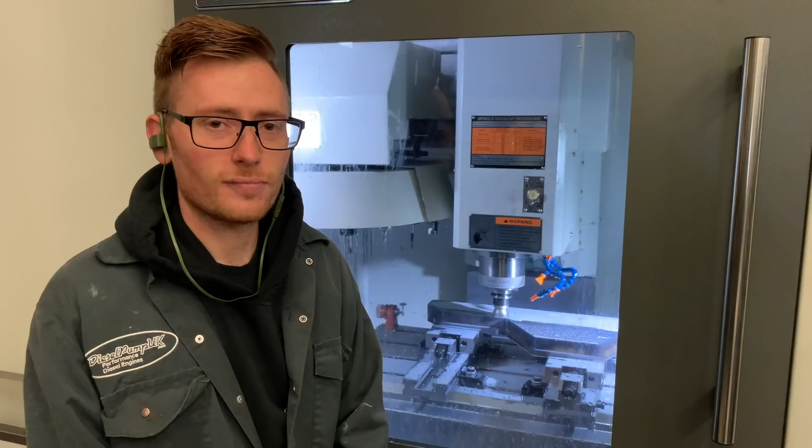Good morning. That noise behind me is a 52mm high feed cutter taking 1mm a pass off a 60mm piece of plate. Today we're talking about billet manifolds, how we build them and how amazing they are.

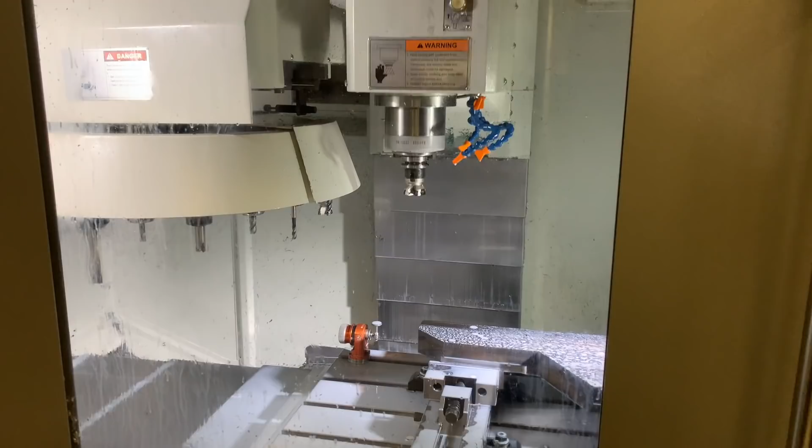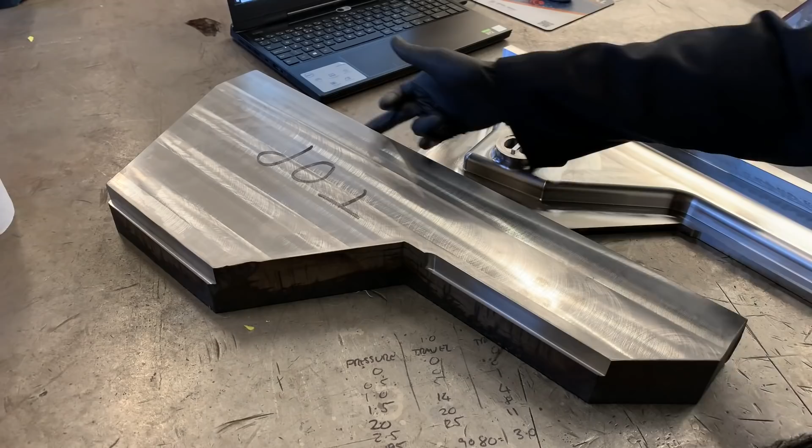So we've just seen that first step in the CNC machine, starting from a 60mm piece of plate that's pre-flame cut, surfaced off, and turned into this. This is basically the very first step, and as you can see, the sides have also been machined to make it parallel, so we've got somewhere good, clean and straight to grip onto. That's step number one.

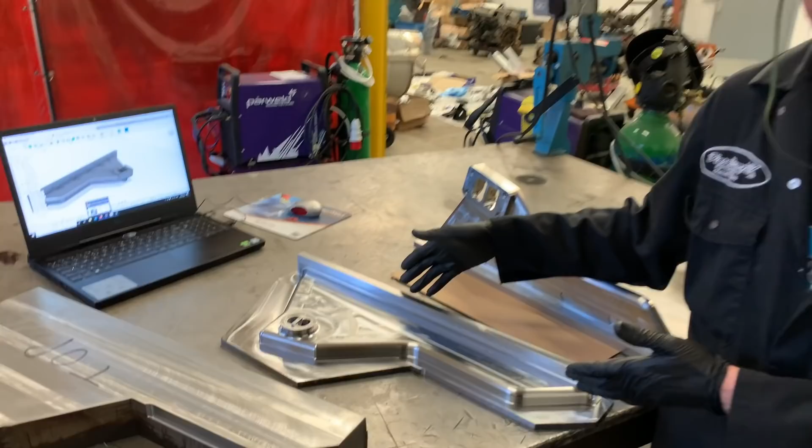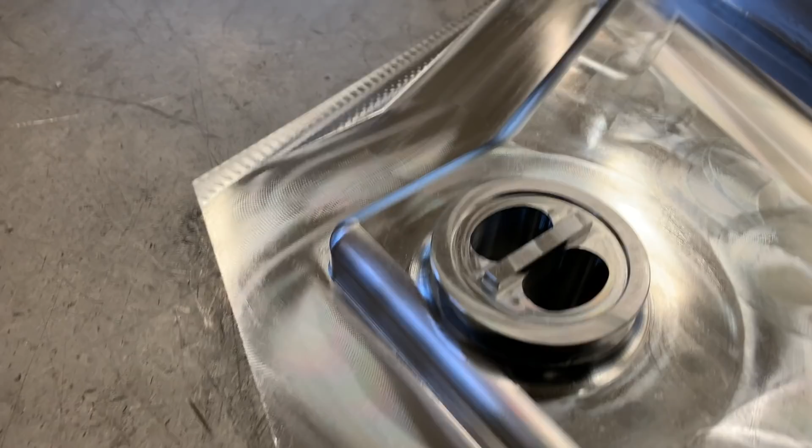Step number two is this here, and you can sort of see it's starting to look like a bit of a manifold, and this is the rear profile. Now this one's quite nice, and we haven't shown you this one before. This has got the Turbosmart 40mm wastegate flange built in, which is really nice. This is a Gen 5 Turbosmart 40mm CompGate.

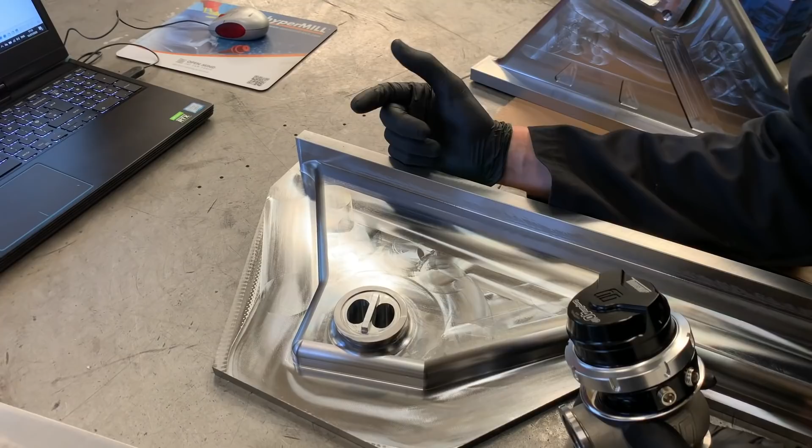This is the high pressure version, so 30 psi is what we're set at from the factory. The whole point of what you can see here is to reduce the need to have two wastegates on a twin scroll setup, because you've all seen probably Skylines, Supras and big power cars like that which have two sets of wastegates for your twin scroll manifolds, and it's just a mass of pipes and mess filling the engine bay. In some cases it looks cool, and in some cases it looks like just way too much filling the engine bay, too much complication. Anyway, so this is the idea we've come up with.

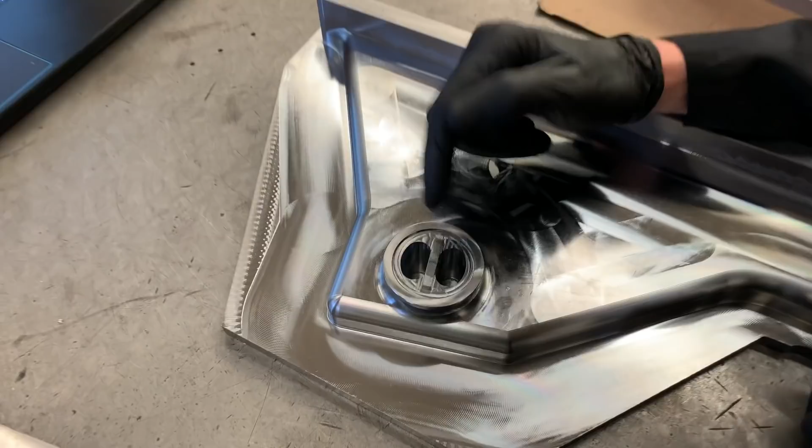So basically this little division helps to divide the wastegate, the gases that are going to go to the wastegate, nearly all the way up to the actual valve itself, the valve seat. This is about as good as it gets to get a nice divided section right up to your wastegate, and that's how we use one wastegate on a twin scroll setup. So that's step two, and that, as you can see on the back, is still

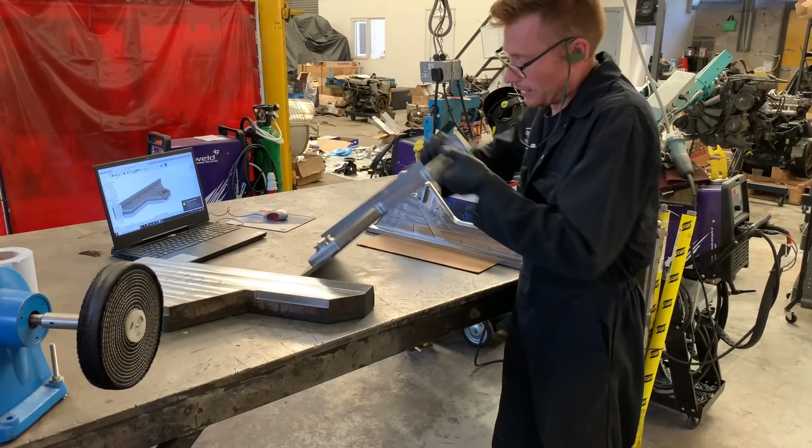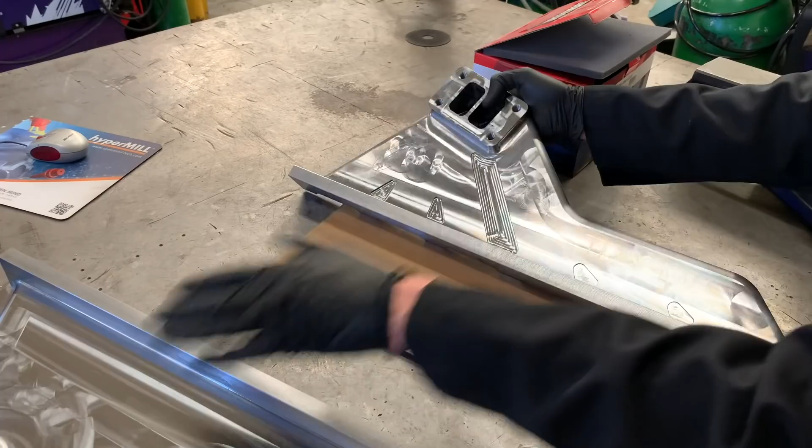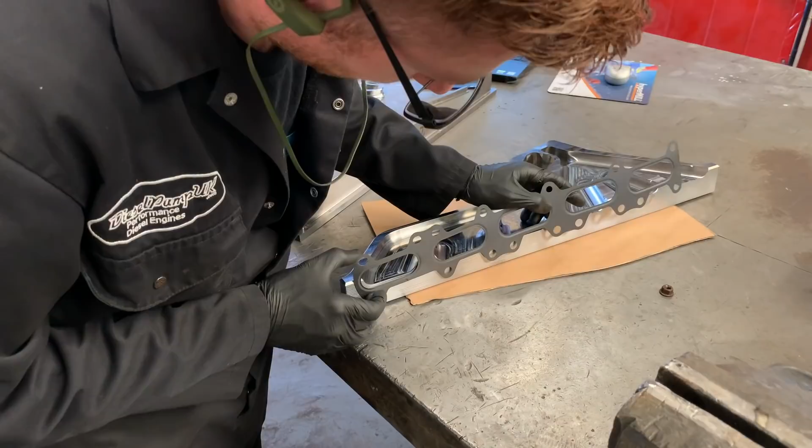just a flat plate. There's no inner profile of that at all. And then step three is this. So this has been through that process, and then it's been flipped, and these are your internal profiles. You can see here you've got really nice radiuses which match the port. You can see how the gasket nicely matches the port profile of that, and that is where we're gaining a lot of the performance over the other manifolds out there.

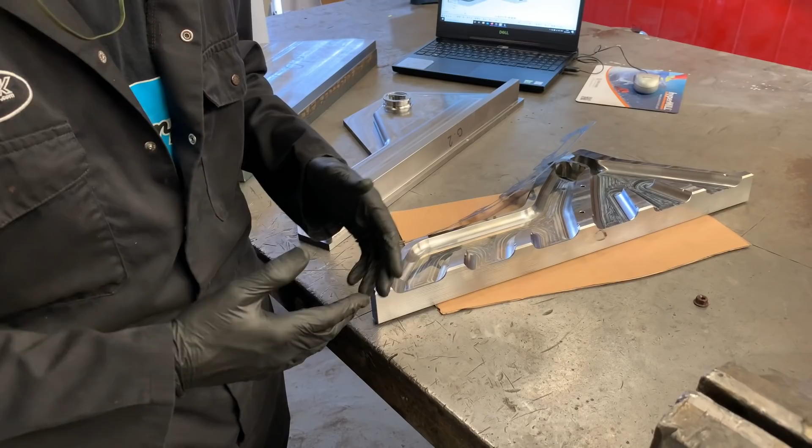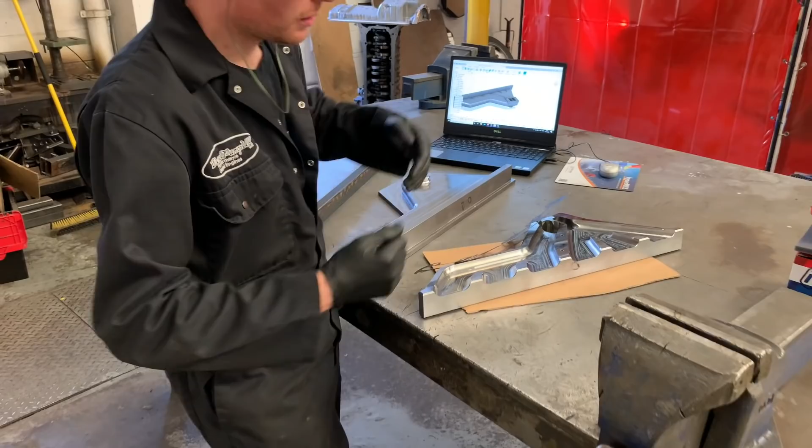We don't have to press cones. We don't have to die grind flanges at an angle. We're not having to get a CNC'd flange that, in a space of 20mm, really ramps in. None of that has to happen. With this, it's just a really nice, gentle transition, which is awesome for gas flow, as you can see - there's no sharp path or whatever.

You can see the two positions here, which is where the dowels go. And these two halves, when machined like this, will locate together, and then I will weld this all the way around. Inside the ports here, you can see there's a nice big chamfer all the way around, so I can put a nice good root pass in there, and then multiple other passes just to make that a really nice strong weld, so that it all stays rigid.

And then once that's welded together, obviously it all locates nicely. It'll get stood up, and then this top profile will be machined, so it'll kind of look a little bit like this sort of gasket shape. Obviously this is a 5-cylinder gasket that picks up, and this is a 6-cylinder manifold, but it will have that nice kind of wavy shape in it with all the holes. But that's the last bit after I've welded it.

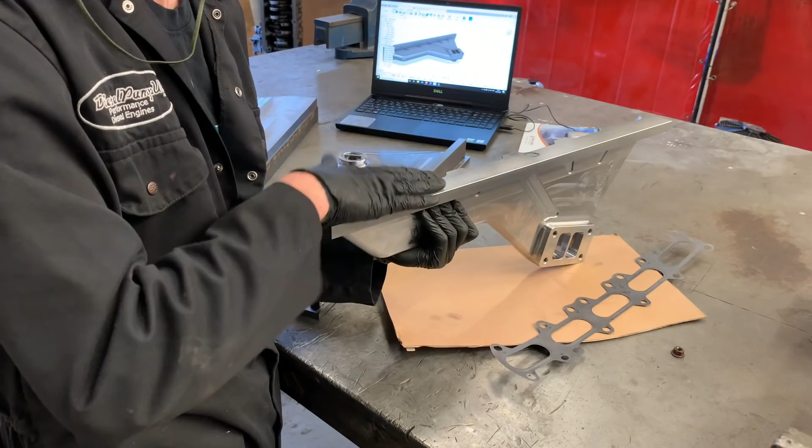Hello. Yeah. So now I'm the cameraman.

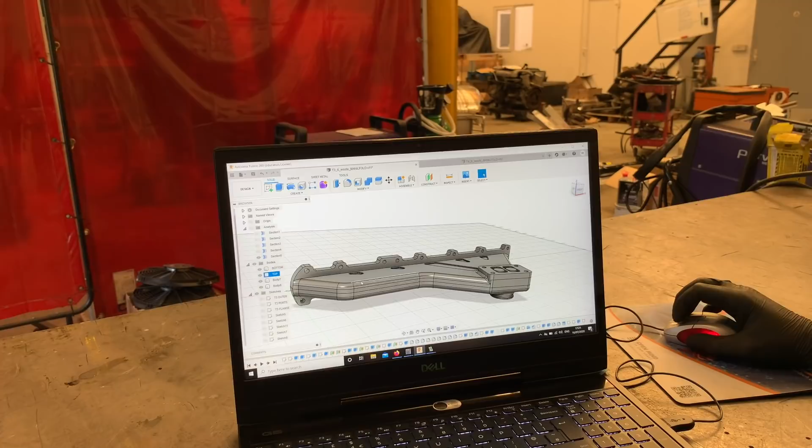This is the 3D model, 6-port manifold. As you can see, this has got it in. Now this hasn't got the flange on - let's put that back on. So that's obviously the flange shape that we're going on, so it looks nearer to the gasket. Yeah, that's good. All this side here will be machined after welding, so you get a perfect seal.

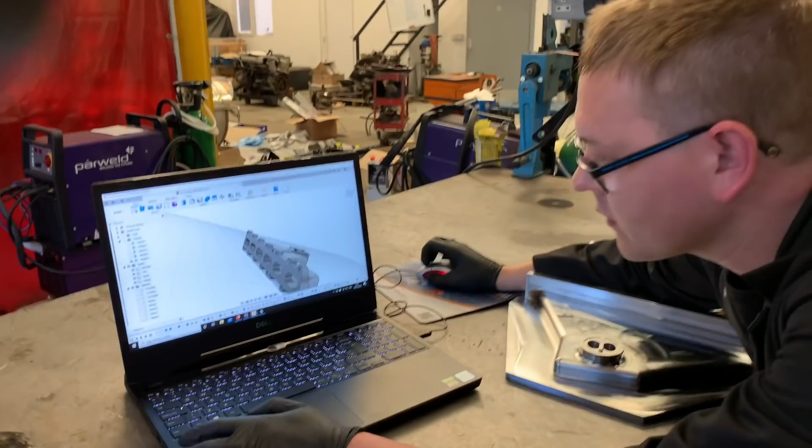So what about the cutaway? Let's see the throat area cutaway where the wastegate lives, because that really shows some of the detail that goes into that. Yeah, that's good.

So as you can see here... This is like your technical bit, but this bit is really crucial.

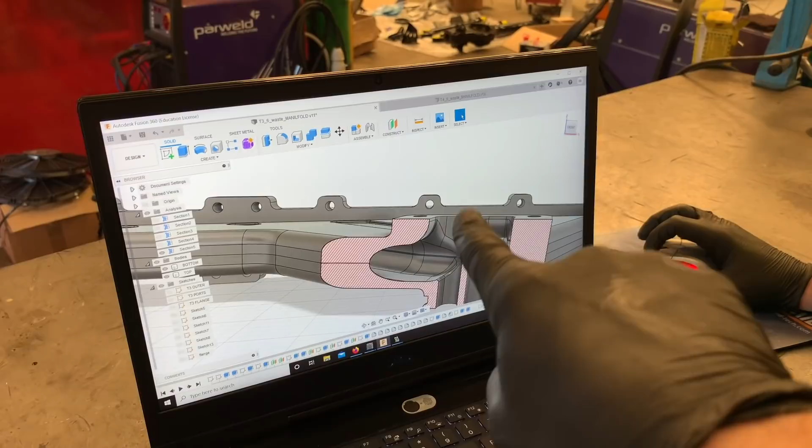Where the transition goes from being horizontal to the gas flow being vertical, the taper, the contour that leads up, is literally as gentle as we can get it. It actually leads into the upper part, so both the top section and the bottom section join together in this taper, which is really important.

And you can see there the path, how it takes a little bit of gas out of each side down to the wastegate, which is pretty cool. You can obviously see that on there. You can see the wastegate flange is even machined in direct.

Anyway, tell us something technical about that. So with the ports in the manifold, the port is either equal to or more than the exhaust ports coming out of the engine casting. So we have zero restriction in the manifold. Yeah, that's going to give us some nice gains.

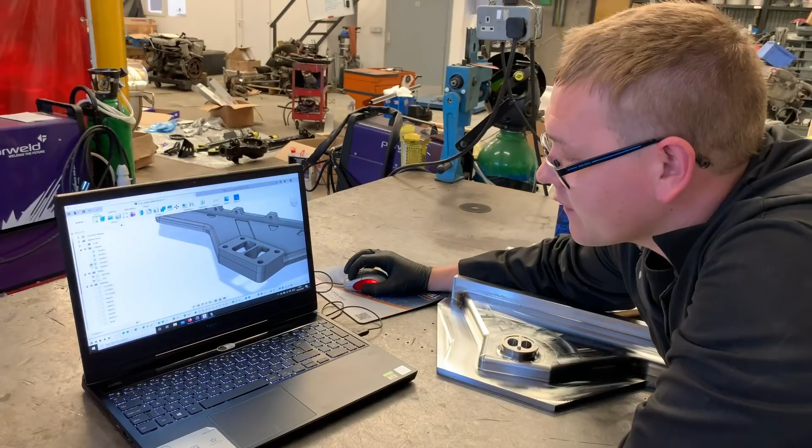That is good. So if we look at the other cutaway now, if we find the right one, there we go. You can see there how we've got a nice radius coming in.

Obviously that radius would look more natural if the wastegate port wasn't there. We do versions without the wastegate port. You can see it there.

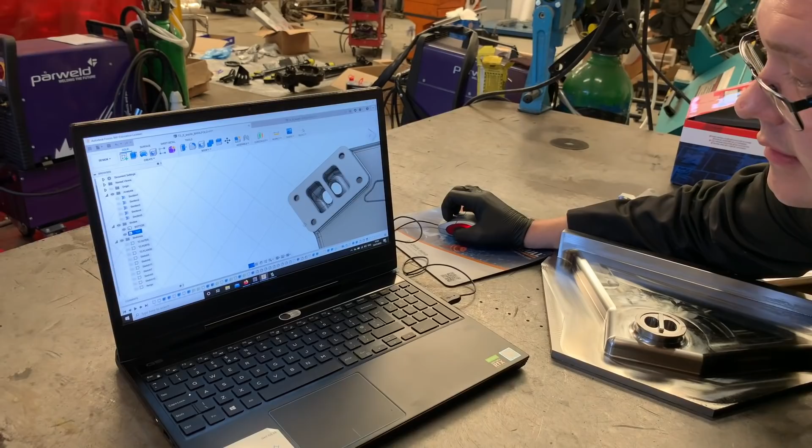That's also important to note, that the inside of this actually has a nice shape leading into the wastegate. It isn't just a rough cut hole that goes down. That's also very nice and smooth. So it's all got gas flow related.

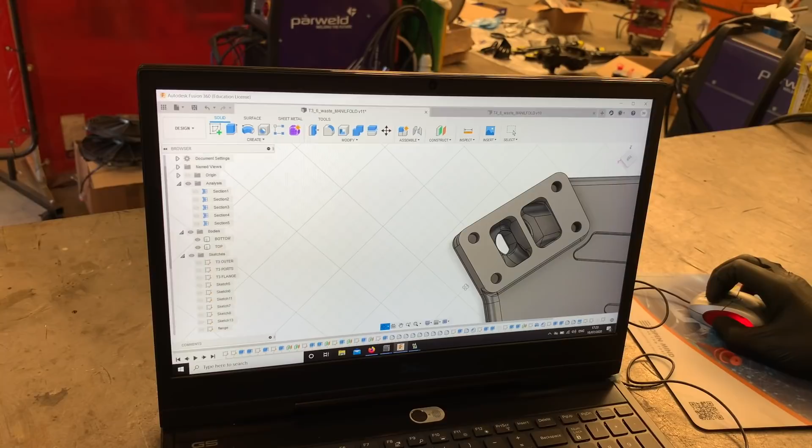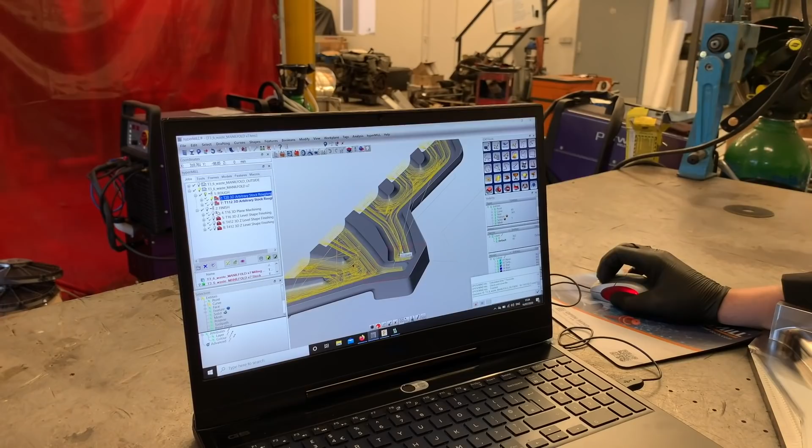So first of all, look at his roughing passes. So this is taking like 2 mil depth of cut and getting some material out just as fast as possible, basically. So that's just getting all the meat out.

But that leaves you with a really jagged edge, like steps. It doesn't give you any smoothing at all. And what cutter did you use? So we used a WNT XDKT using a 0.8 radius insert.

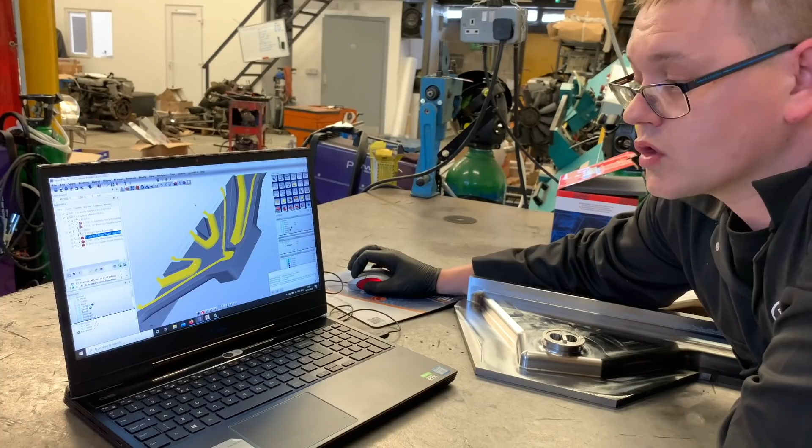Okay, we then go on to finish machining. So as you can see now, it's going down the walls at very small cuts but extremely high feed rates, and that's what gets us the smoothness of the parts.

And what tool was that? Again, another XDKT, but the inserts now had a radius on it to create a bullnose tool. Ah, right, okay, just a larger radius. Yeah, so 2.5 radius on this. Oh wow, so that gets us a real nice blend.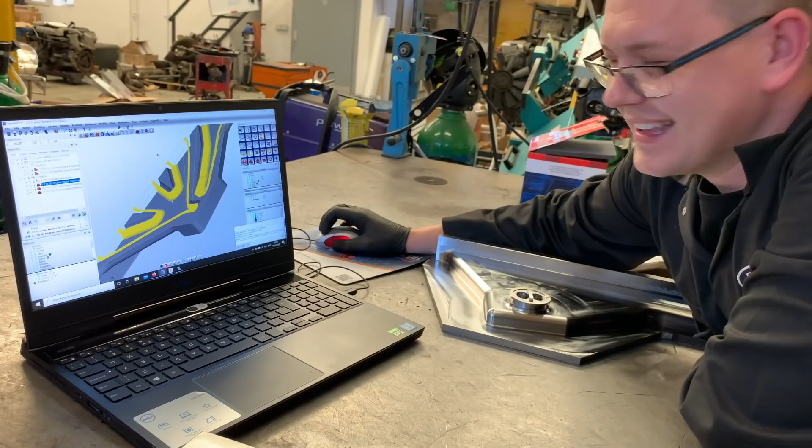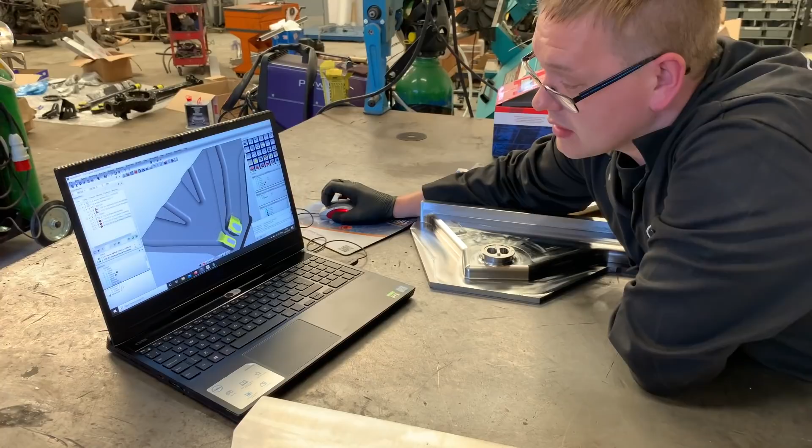Did you have to modify the tool body to make that fit? I did, yeah. And then finally, because it's a 16 mil tool, it can't get into all the little nooks and crannies. So we're going with a little 12, and the 12 mil ball nose takes out all the bits that the 16 can't get to. But rather than wasting all its time going around everything again, it only goes in and gets the bits that the 16's missed. Yeah, perfect, so it's all about just getting some efficiency out of the tool path as much as possible.

Right, well what I'll do in the next part of the video is show a little bit of that. We'll clean the screen on the machine and then show it doing a little bit of those passes.

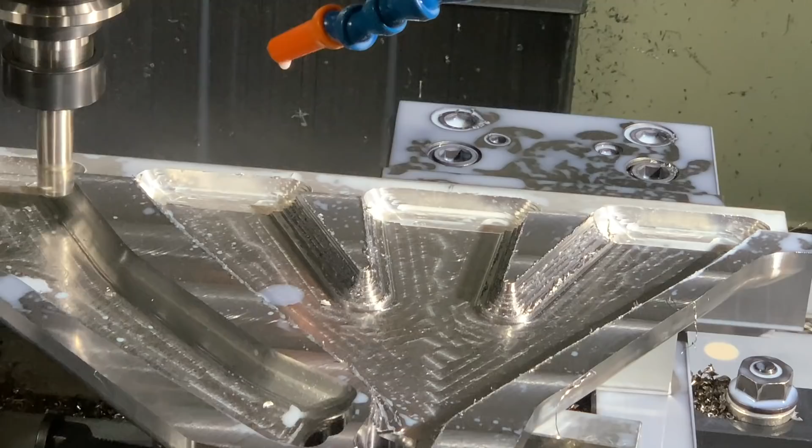This cutter is doing the final finishing pass. You can see, if you zoom in on a step section, the initial roughing pass, which is the first steps that we showed on Hypermill, and then this is actually just completing it and making them really smooth, which is nice.

Normally this would be running coolant and it'd be squirting everywhere, but for the purposes of this video, we're not, so that you can see the amazing things that are going on, even though it doesn't look like a lot's going on.

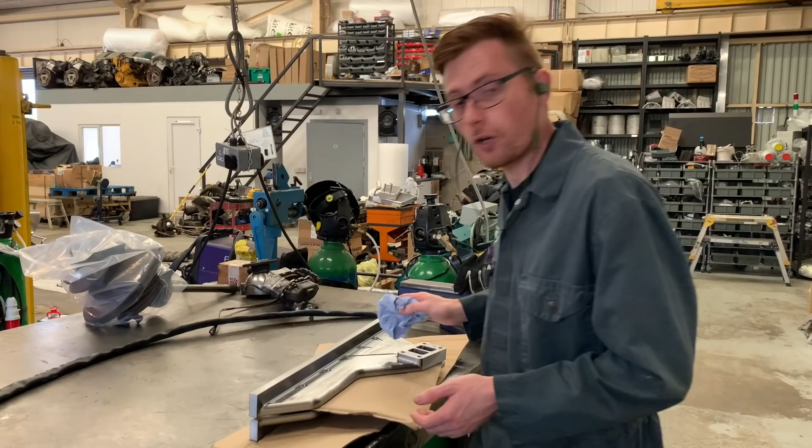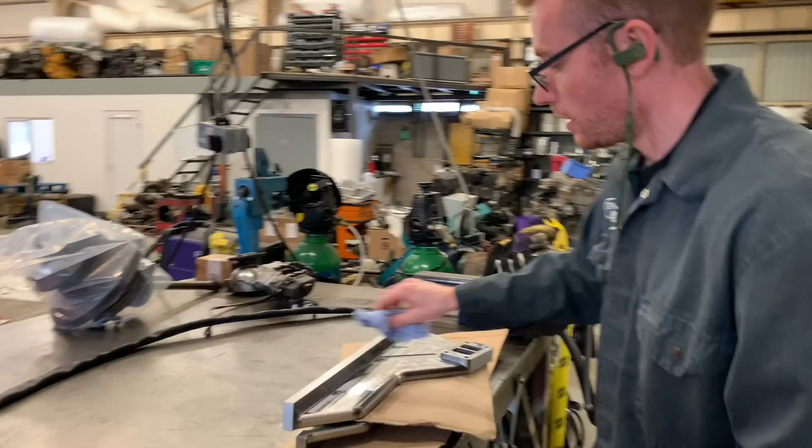We're on to the next phase now. Jonathan has presented me with 2 of his nicely machined pieces, which is great. And they've all been oiled up so that they don't corrode or get any surface rust overnight. So what I've got to do is take a little bit of thinner and wipe these all down just to get them absolutely clean, so there's no traces of oil ready for me to weld.

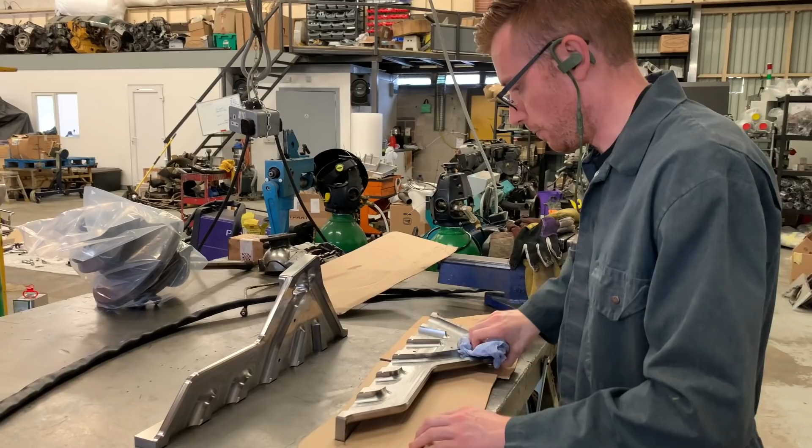So as you can see, I've got 2 perfect halves. They have dowel pin positions. I just have to pop the dowel pin in, but I like to give it a wipe out first. Look how nice they look.

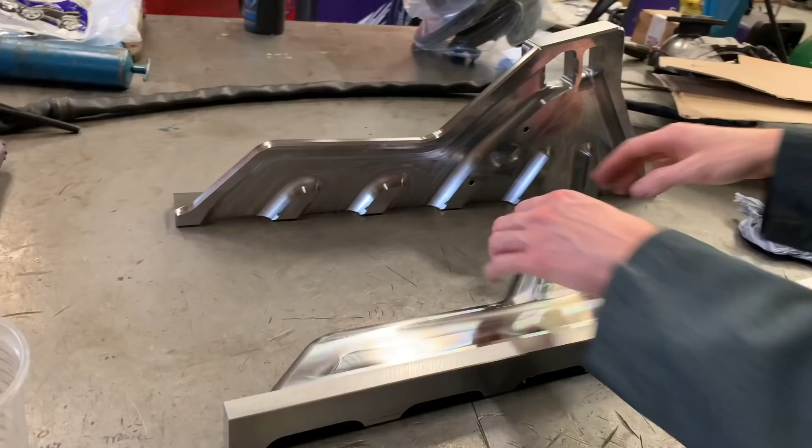Look at that with its wastegate. You can see these are unique. But there is a difference between this manifold and other billet manifolds out there, and quite a big one. This is being done just out of 2 halves. A lot of other manifolds you'll see will have a separate flange here and a separate flange there, all sorts of separate parts, where this isn't. This is actually just 2 sections, and it's quite rare to see that. It's very rare, in fact. I don't think I've even seen one other.

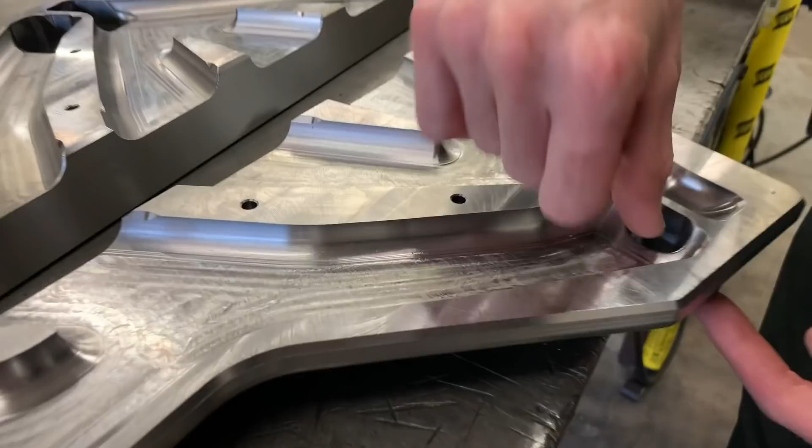You can see the wastegate ports, how nicely formed they are, and they even have a nice beveled edge, and then a nice ramp that leads up into the port as that comes round, so all super smooth. It's quite awesome. That's the last time it's going to be seen before I weld it.

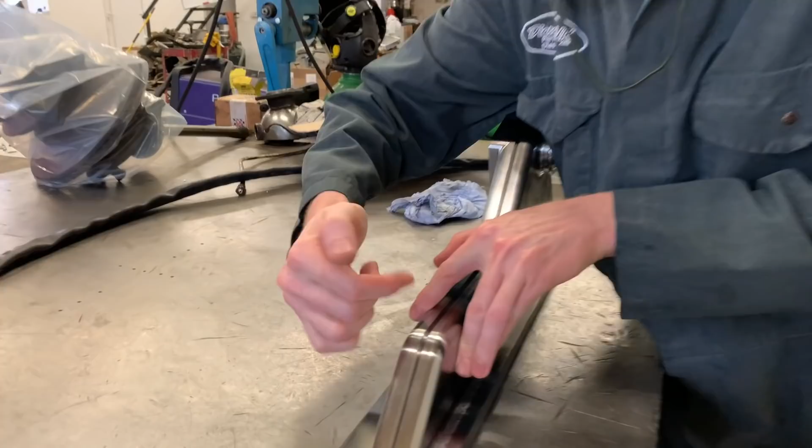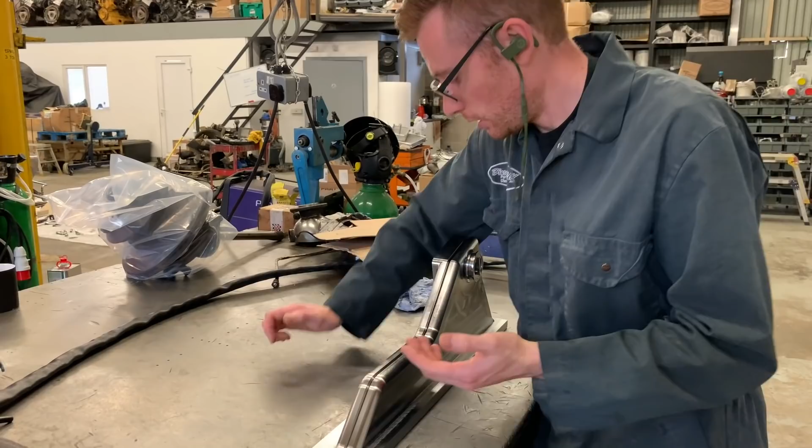And you can see here, we've left a nice weld prep, well, it's machined in, so that we've got a really deep groove. So that weld, you're talking sort of 5-6 mil of fillet in the manifold, even flush. So, you know, get that as super strong as possible, and that goes all the way around the back, and it actually goes even into the ports themselves just by a few mil. And I actually put the welder in there and TIG weld right down the actual ports to get them connected together.

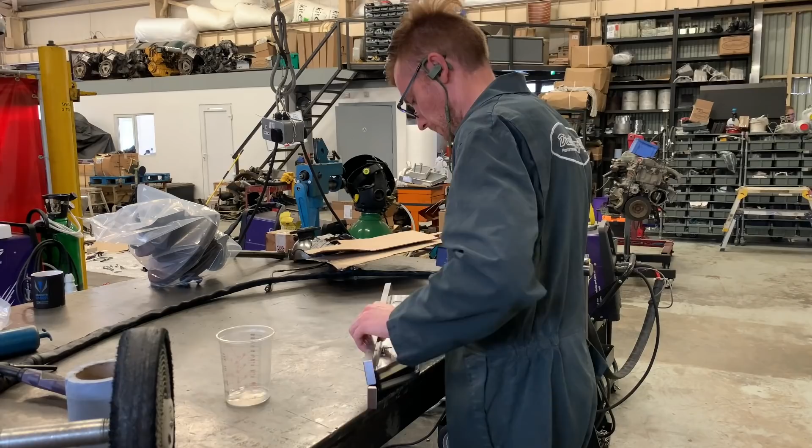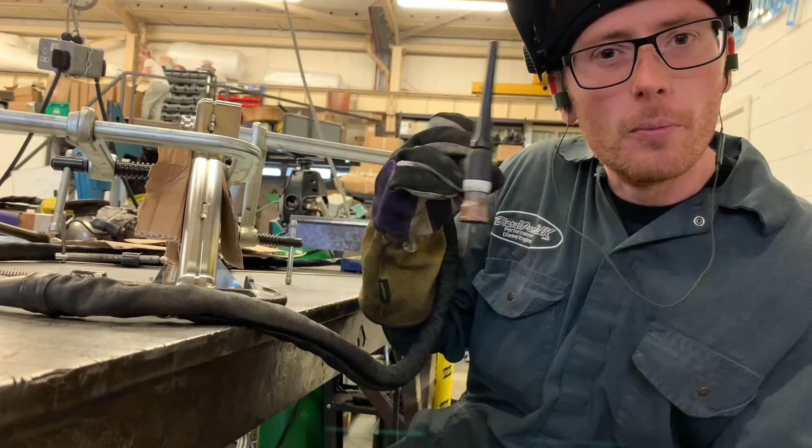Just applying a few tacks all the way around the manifold so that we can take off the clamps, and then that'll allow me to get much more movement and more comfort as I'm trying to weld it along the main passes. But it's coming out pretty nice.

Just adding a tiny bit of filler rod. This is the initial pass, so we need a decent bit of heat. Take your time and try not to burn the sidewall. I'm just running out of hand travel there, where I've got my hand rested, so I'm going to have to stop and move along.

I'm going over the original tack a little bit. I'm not going to take it to the full length. There we go.

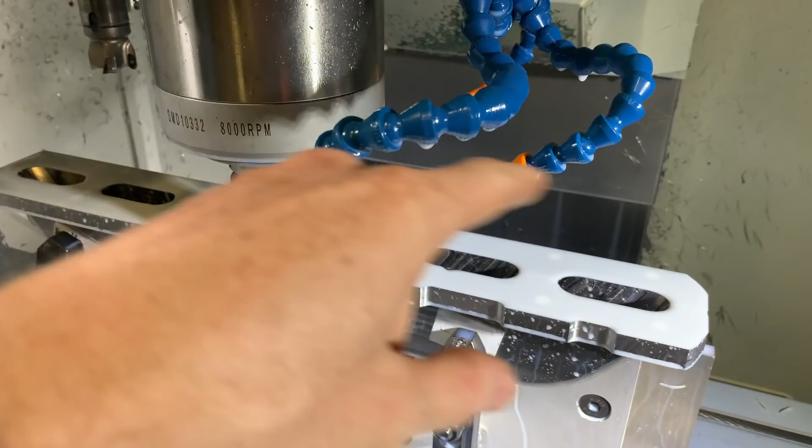So the final op, which is making it flange shaped, and you can see we've just started, and this is obviously where it's been welded together. Some spot marks have been done for the holes, everything's being clocked up, and yeah, take her away.

I like this process because it's the last one. And these are epic. Lots and lots of machining work. All to bring you guys the best manifolds for your OM606 or 605. Right, so this is the finished product.

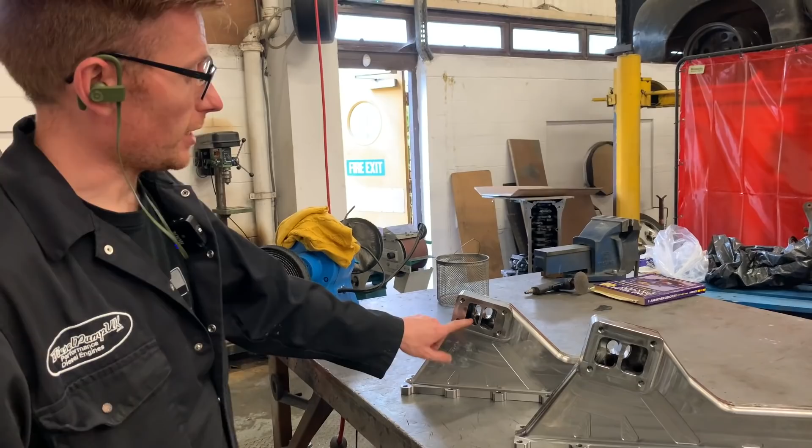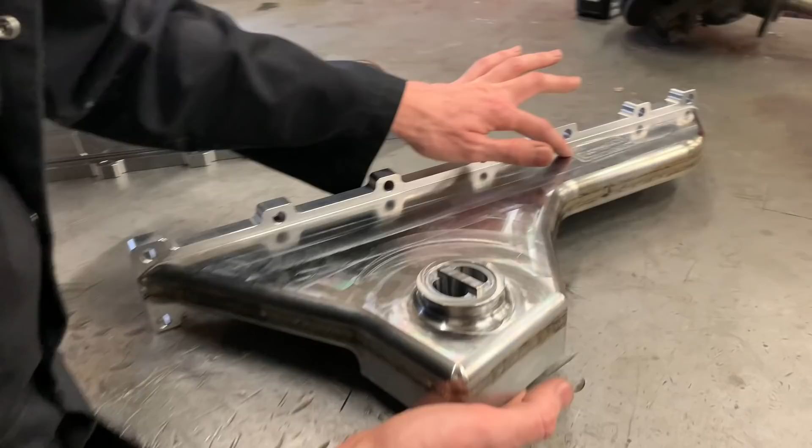And what have we got? We've got T3 and T4, and they're both wastegated versions. So we have the beautiful wastegate port in there. And as you can see, they're dated with the model. So this is a T4, 6-cylinder wastegate.

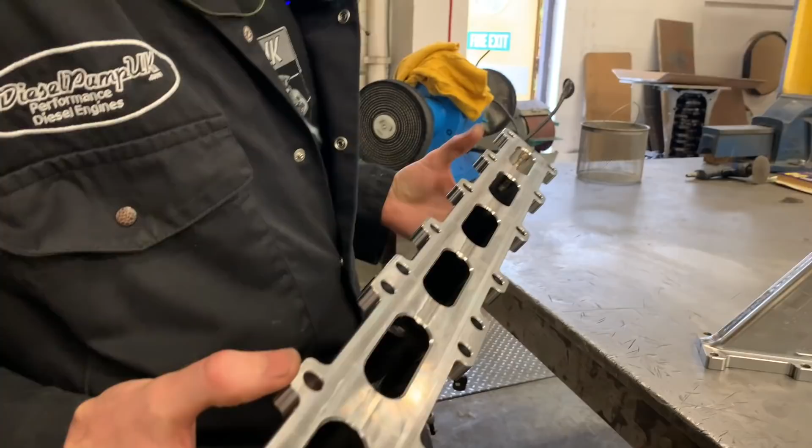But you can also see the flange is now fully finished. So you've got all the original shape put back in, a bit like the standard gasket, and all the inner profiles are chamfered. You can see where it's all been welded, and I'm really proud of the result.

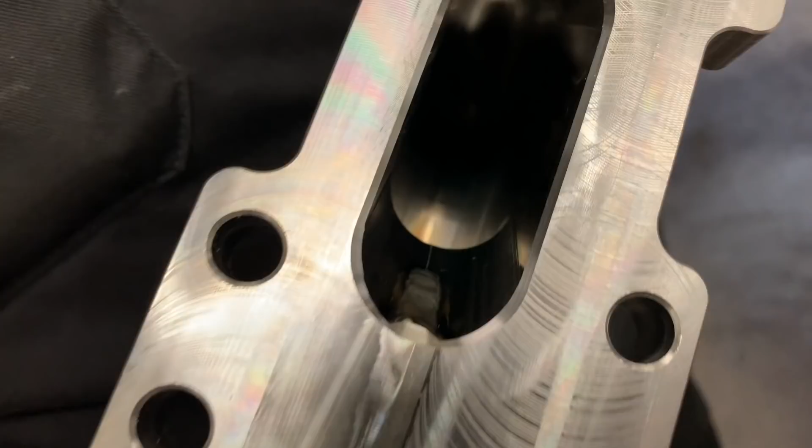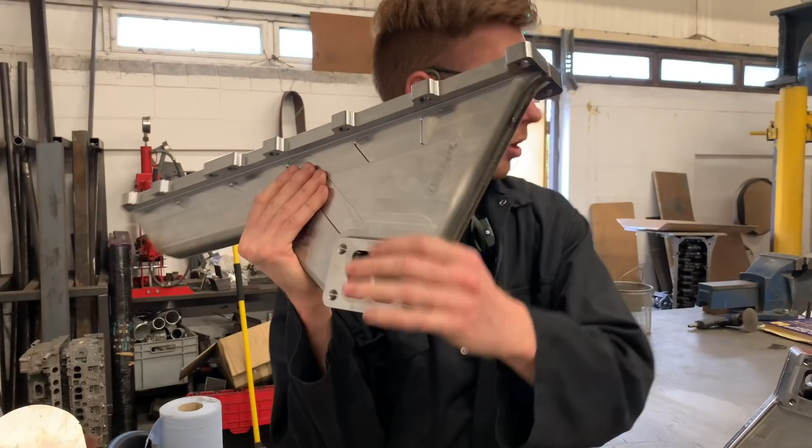It is a really fantastic finished product. One of the more interesting points is we did a weight comparison, because somebody mentioned the billet manifold versus the tubular. As soon as we put a photo of this online, someone straight away said I bet it weighs a ton.

Well, actually, let's weigh it and find out. Let's see, we'll do T4 versus T4. Let's find out.

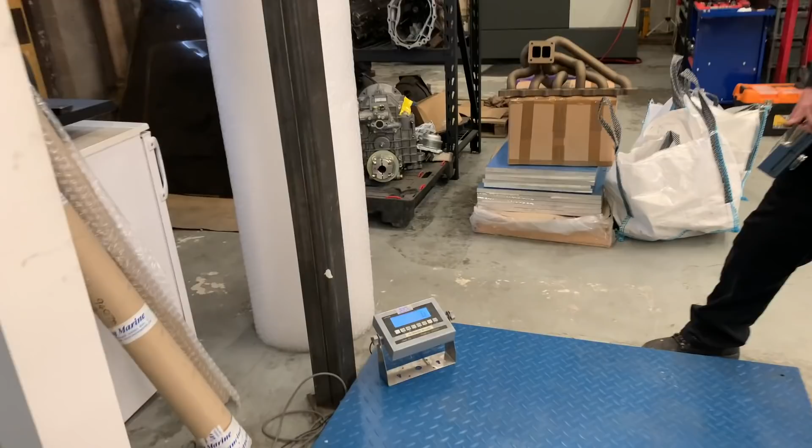Scales are zeroed, as you can see. 12 kilos for the billet manifold.

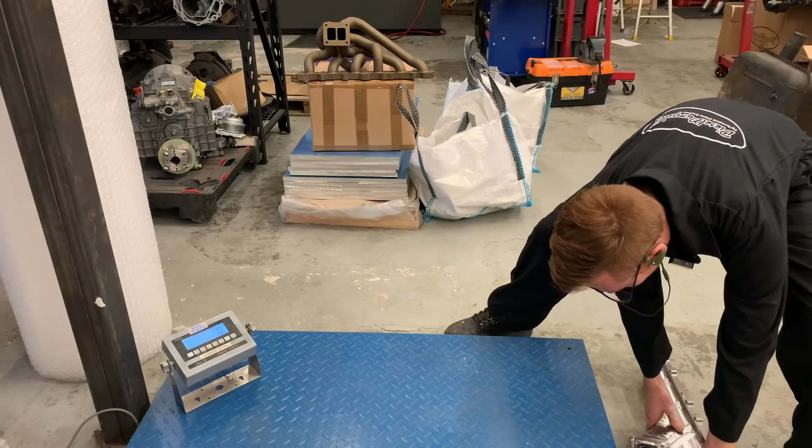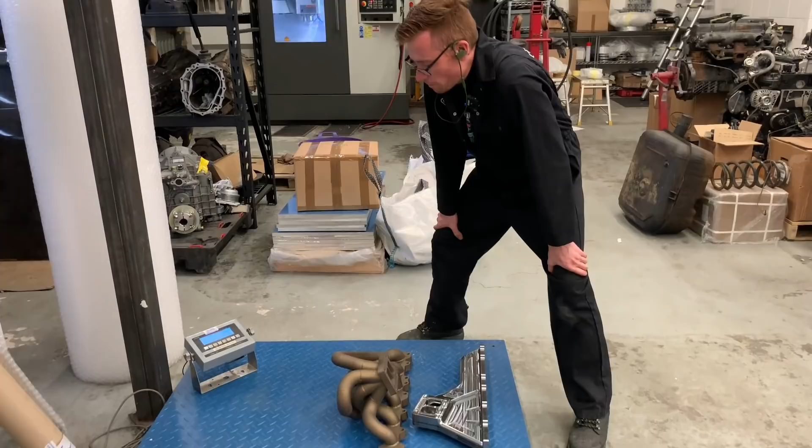Take the billet manifold off. Fabricated manifold: 12 kilos. So they are identical. Both are T4s. Let's put them both on together: 24. Both T4. The only difference is this one doesn't have a wastegate outlet.

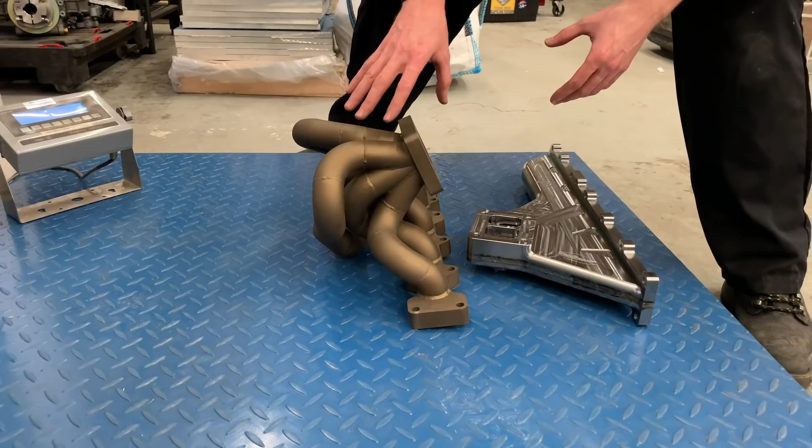Normally if we wanted a wastegate on this one, we'd have to weld an extra piece in here, so there would be a little bit more weight. It'd be negligible, but a little more. Still, you can see the obvious benefit between these two manifolds here.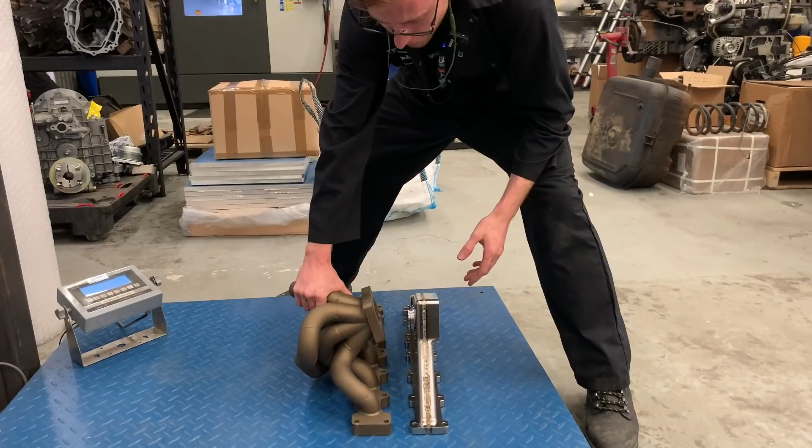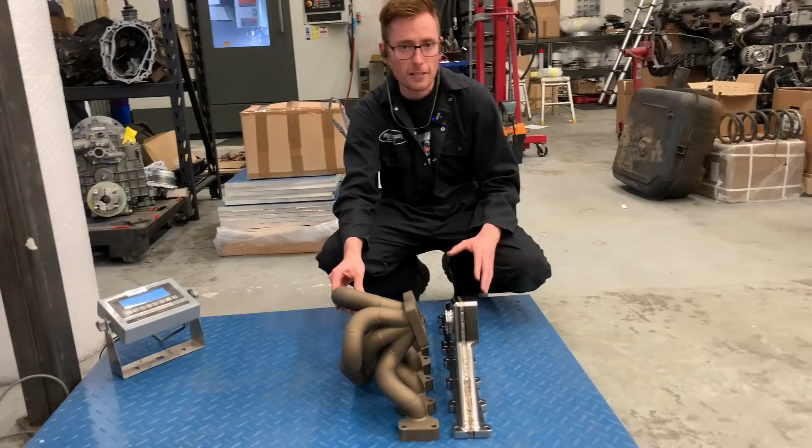These both obviously bolt onto the very same flange. Look at the distinct advantage for room that you get. There is so much more available space in your engine bay simply by having this design over this.

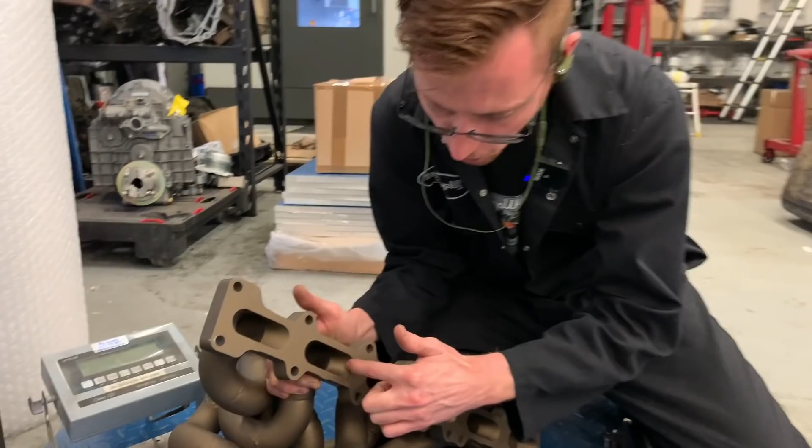The other obvious benefit is that with a CNC'd manifold like this, we don't have to have this really sharp immediate transition, which on the 606 exhaust ports, our outlets are here and here. So we're running instantly into a brick wall, and that's literally the case with all tubular manifold designs. Some are worse than others, with a very thin flange immediately going at an angle, which is terrible for flow. That being one of the most restrictive points on a 606 build manifold, we addressed that.

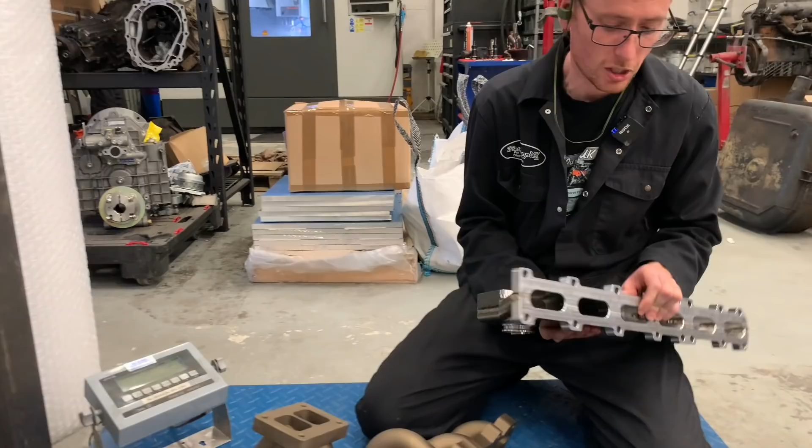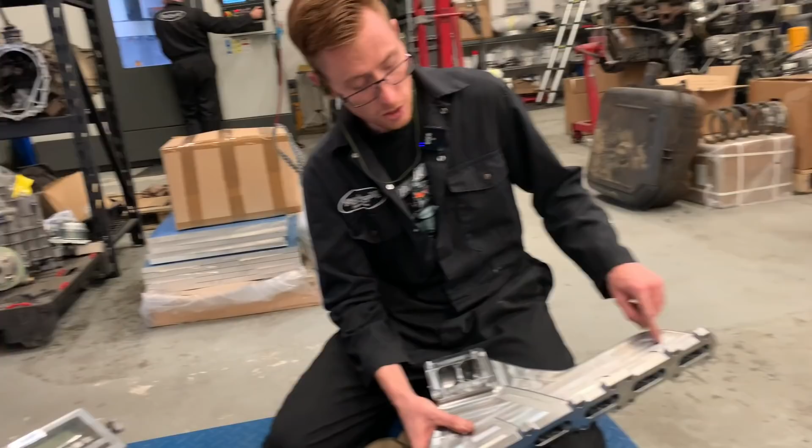That's why if you look inside the ports of this newest design, they literally are full width, so when those exhaust gases flow they are not restricted by anything. They go directly into the port and on their way to where they need to be. Lots of care has gone into the flow dynamics, so every curve, every corner doesn't have any back eddy effect, and everything has a really nice gentle flow.

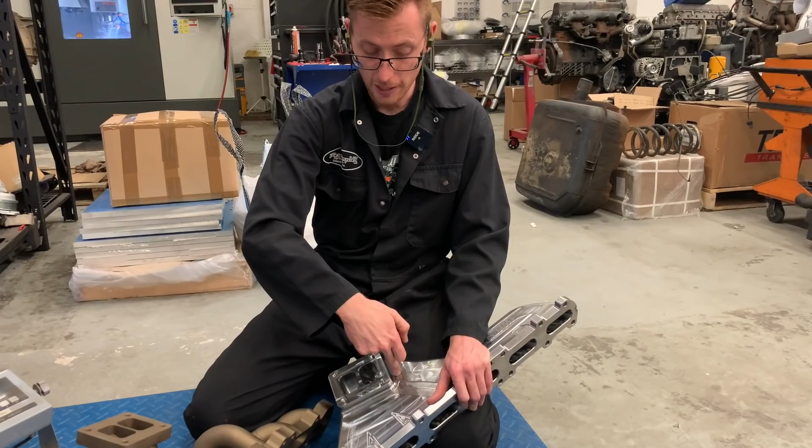From the first one of these to this one, we've even modified the ramp angle in here, because the only real corner the gas has to travel around is from horizontal, coming out of the engine, to vertical, going into the turbo. So we've made a massive transition in there. It literally starts right back here and ramps all the way up into the port in a really nice way.

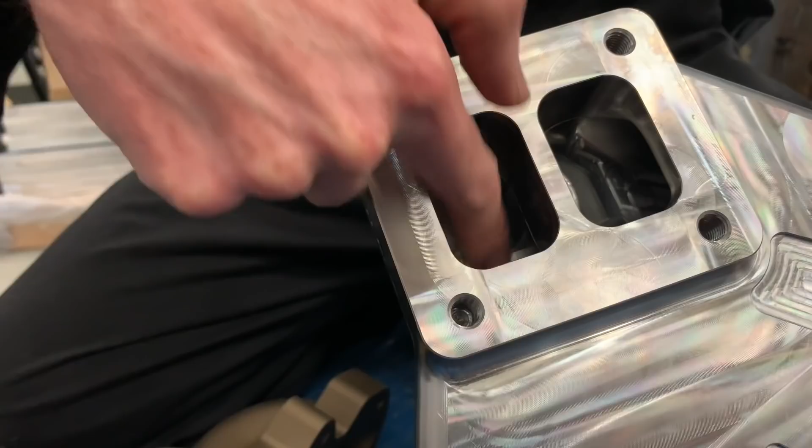This one comes up from this angle like this, and this port comes up from this angle like this, because they're coming from two different directions. You can see into the wastegate there as well, all divided.

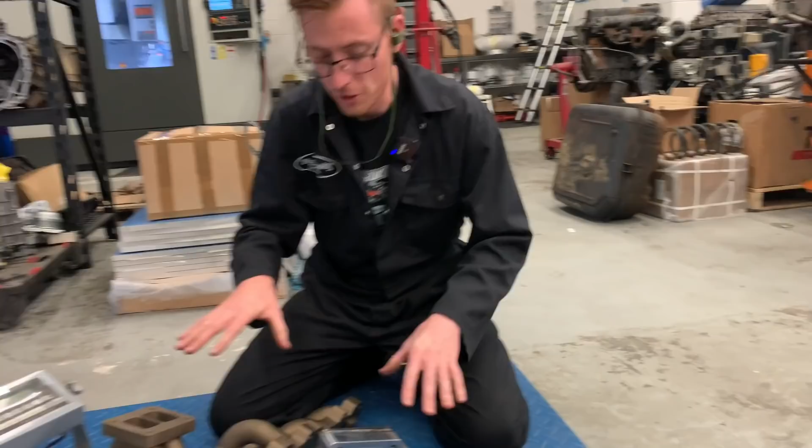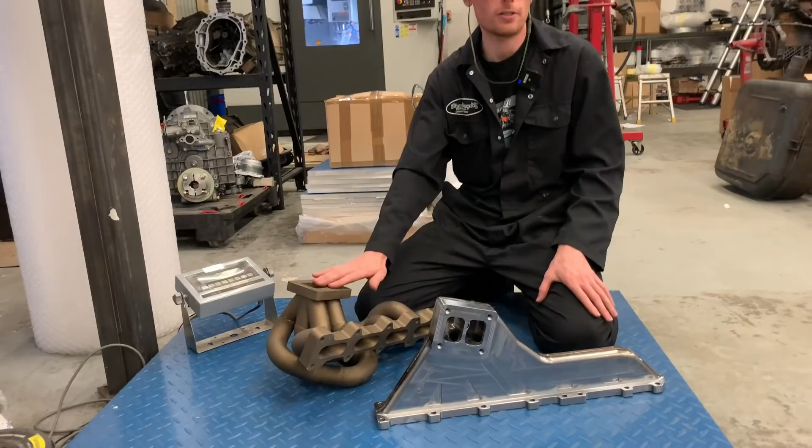So weight comparison, they were the same. Space in the engine bay, this is 10 times better. This will fit in many more applications than this. We only have to have one design of this for 6 different tubular manifold designs, so that is a huge advantage.

So there you go, the finished product versus our previous product. This one is gold ceramic coated, which is also worth mentioning. You can have any of these ceramic coated if you choose.